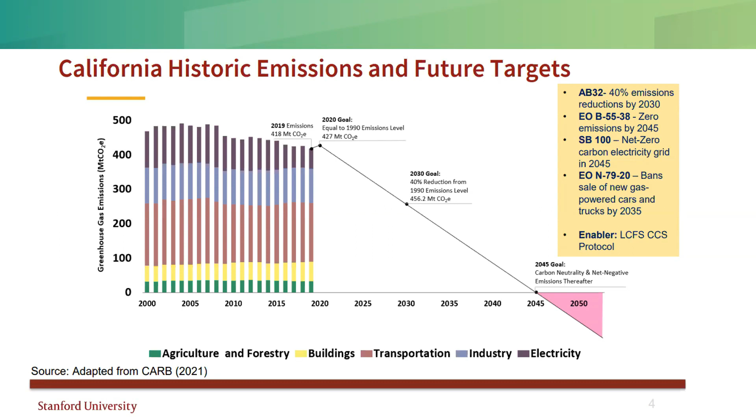I certainly enjoyed this opportunity when I was at the ACI conference in San Francisco. But just to give you a little insight as to what California is looking toward in the future: in 2006, California passed AB 32, which required the state to be, by 2020, at 1990 levels of CO2 emissions. In 2030, we're required to be 40% below 1990 levels, and then to reach essentially carbon neutrality and net negativity after 2045.

The cement industry has been a key part of the cap and trade program here in California, and you can see on this slide we work very closely with the California Air Resources Board in terms of closely monitoring our emissions, but also projecting and enforcing reductions in our emissions. In the state of California, you can see on this graphic that while the industrial sector makes up about 20% of emissions in the state, the cement industry is right around 2%.

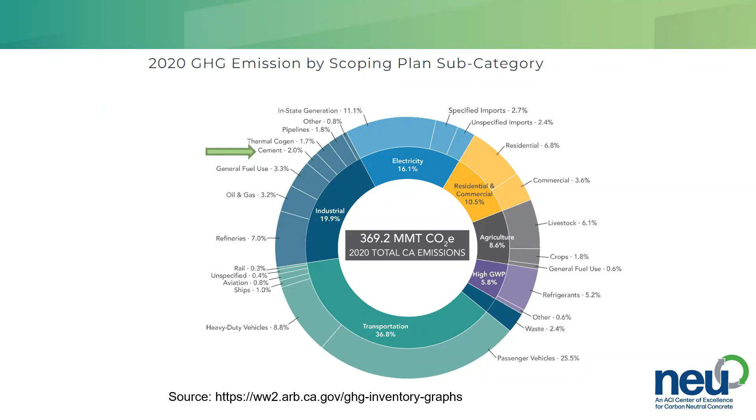That's larger than the percentage nationally, which is closer to 1%, but that 2% comes from the 7 cement plants in California, and we are on that same trajectory to hit carbon neutrality by 2045. Our industry is committed to this. We wanted to mention that we have a carbon neutrality plan that we came out with 2 years ago, which we're about to reissue with updates this coming month in July, right around the flip of the calendar. We're pretty excited about how we're seeing progress in certain areas, and we've identified new opportunities. I'll describe what that carbon neutrality plan includes.

It includes this one bold goal of reaching carbon neutrality by the end of 2045. What we recognize is that this is a commitment that's one of these all-of-the-above approaches. You'll see the 8 levers in this plan, but we believe all of them are important to really unlock that pathway to make this happen.

It is extraordinarily difficult to do this, and we also recognize that we need close coordination among stakeholders throughout the value chain. This doesn't just include industry, but it includes owners, developers, engineers, and architects - I'm pretty sure we've got a few of those in the virtual room here today. And we've got a very high priority of dealing specifically with stakeholders through the public policy ecosystem - that's legislators, regulators, and other stakeholders.

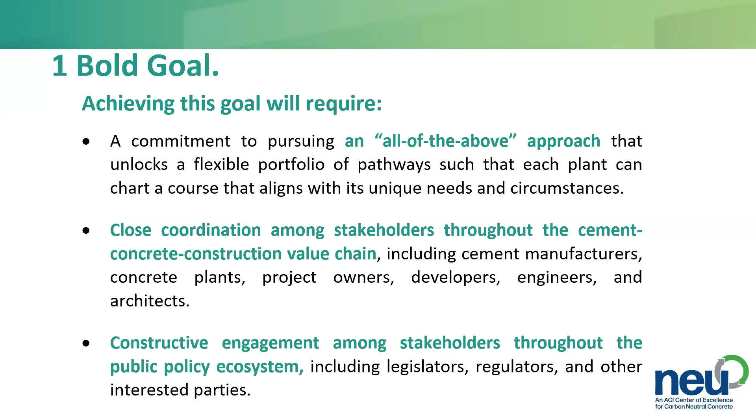Now I'm going to show you a couple of slides which may seem very basic, but it gets to how we're approaching carbon neutrality. I'm guessing most of the folks in the audience this morning understand how cement is produced and that we have a necessary thermal process, which really comes from two sources.

The emissions that come from cement production include both process emissions and fuel emissions. It's really that 61%, the big blue part of the circle on the right here, that is the most difficult to abate.

As you probably already know, the limestone that comes into the kiln that you see here on the left-hand side finds its way down and goes through a calcining process, which naturally releases CO2 when you're basically melting it and changing its chemical composition.

So our plan looks at both process emissions and fuel emissions with specific strategies and goals. And this is what it looks like. We have three pathways and eight levers.

The process emissions are really addressed through these first three levers. The first of which is blended cements. This is the lever that if you're an engineer, you can reach for and start pulling on now.

All of the other levers, two through eight, really have to do with the way cement is produced within the footprint of a specific plant. But as you can see here, we've identified levers such as carbon capture, use and storage, alternative cements and clinkers, all as part of process emissions.

For combustion emissions, we've identified renewable natural gas, various types of alternative fuels, and on-site electricity generation as another area that we think is vital for reaching these goals.

As you can see in these first two columns, we recognize the need for legislative assistance in six of these eight levers, and for regulatory assistance in seven of these eight levers. And knowing that cement is the largest impact for CO2 in concrete, we recognize that this matters not just for our industry, but for the entire concrete industry.

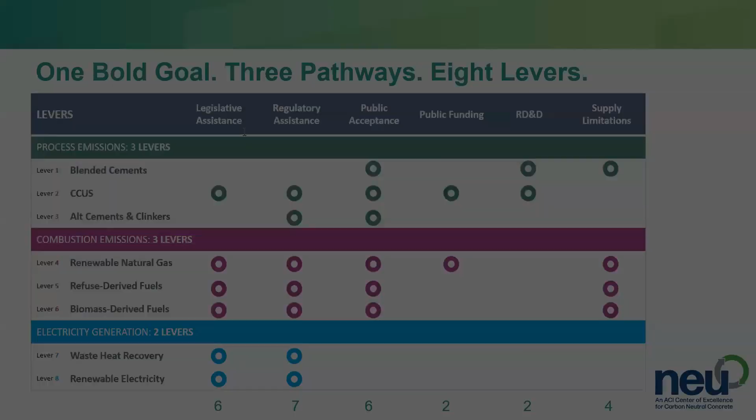This is why we spend so much time focusing on the legislative and regulatory part of each of these endeavors. We also have public acceptance, public funding, research, development and demonstration, and supply limitations that all come into play for various parts. We also recognize that these various levers have different timeframes.

The timing is important because reaching this goal of 40% reductions by 2035 per the Senate bill I'll be mentioning, and net zero by 2045, really puts pressure on us to start making a difference.

I'll mention one of those, carbon capture, use and storage. Just talking to one of our member companies recently, they anticipate an 8-year process to install a full carbon capture system at a plant. That timeframe really needs to be sped up and accelerated for us to start meeting some of these goals. But we'll talk about a couple examples here.

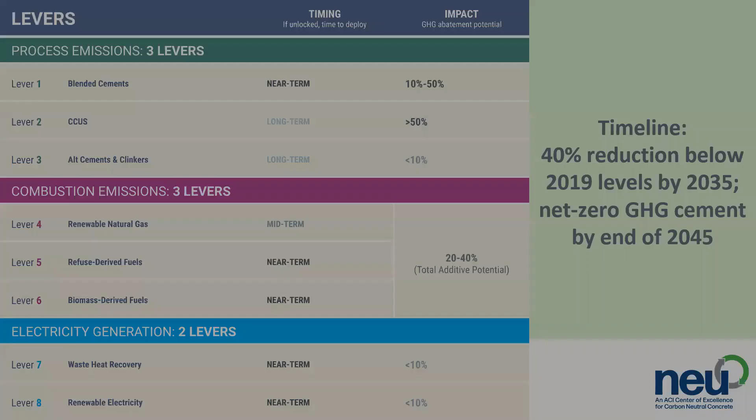I won't get into all eight of these, but I'll show you what a few of these look like in terms of how we're doing this.

So pathway number one is reducing process emissions, as I mentioned. It is the most significant constraint on abating emissions for our industry because of this natural byproduct in the process.

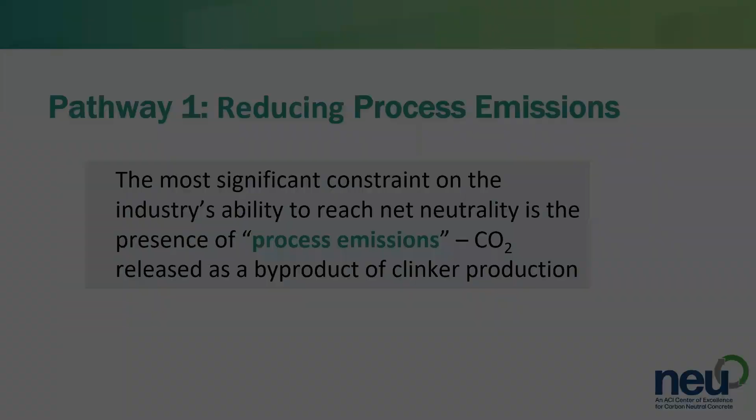So one example of a product that is becoming more and more familiar, not only in California but beyond, is Portland limestone cement. I feel here that the California story is important because so many states in the West look to Caltrans for approval.

And this doesn't just go for DOTs. Caltrans approval is looked to throughout the industry here as something very important. But nationally, we know that all the major barriers are removed, from AIA to government work throughout the Defense Department, ACI, ICC building codes include PLC.

Caltrans was the 38th state to approve Portland limestone cement, but only after a 3-year study at Oregon State University, where they really wanted to dive into the impacts of California-specific materials.

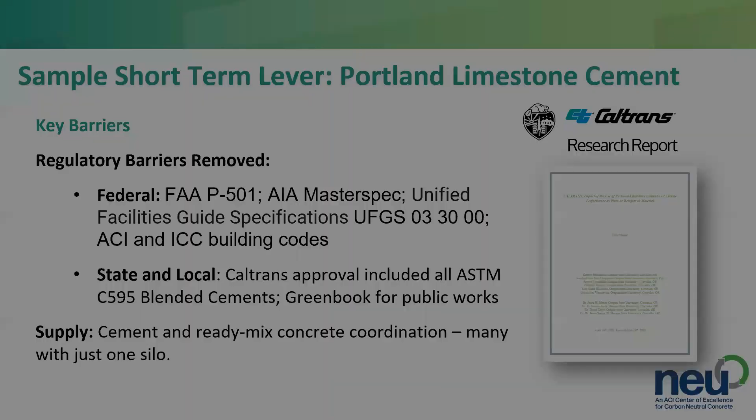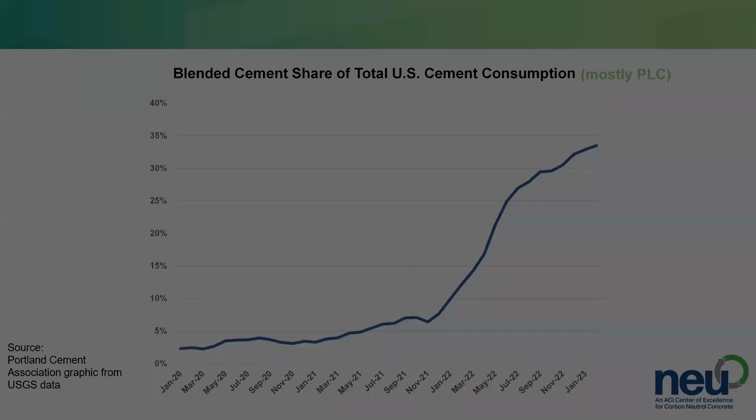Another lever related to process emissions is carbon capture. Here, we recognize that technologies are still in the early stages. There's only a handful of projects underway globally at the moment, and it also requires quite a bit of energy and cost.

So this is one of the areas that we feel like it's very important to work with state government, particularly in a market like ours, which is exposed to imports as well. So if cement plants are making investments as deep as these are for carbon capture projects in California, our companies need to be assured that it's not a risky investment.

We also recognize beyond the cost impacts that there are significant permitting delays that typically impact projects of this size. So those are some of the things that we're looking for, really pushing forward with that particular technology.

Pathway number 2 looks at fuel switching. One of the things we are looking at is using different types of fuel in cement kilns, much like we see in other parts of the world. The emissions intensity of products other than coal can help reduce emissions here, and it's really the amount of these alternative fuels that we'd like to see increased. For instance, the EU is now over 60% in use of alternative fuels, while the United States is at 16%, and California is still under 10%. So we've got a ways to go in this area.

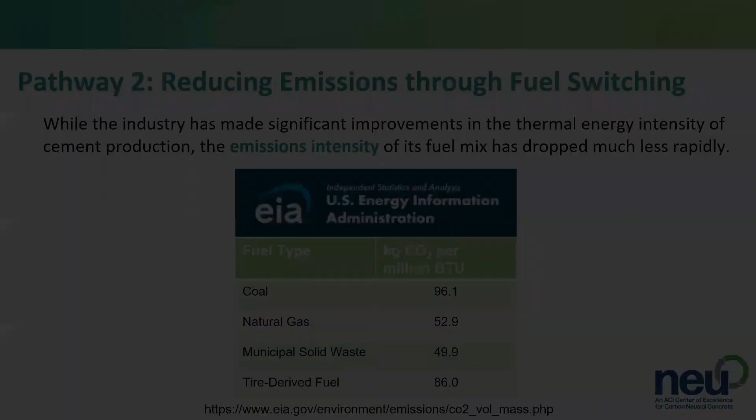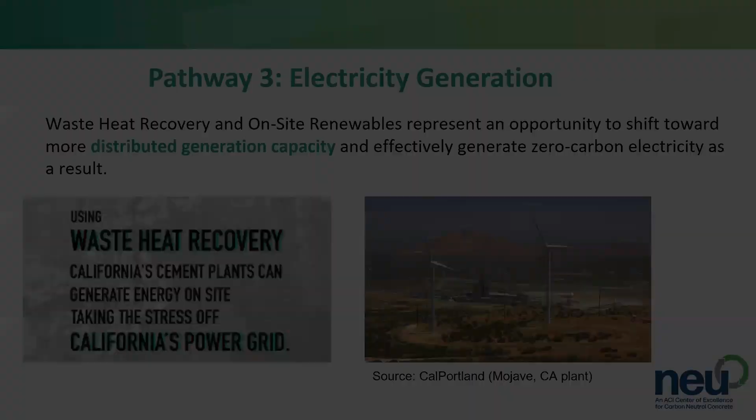Now I'll mention Senate Bill 596. I outlined the pathways we see for getting to carbon neutrality. Shortly after that report, completed in 2021, came out, we worked closely with Senator Josh Becker out of the Bay Area on this bill, along with the Natural Resources Defense Council. This is important because it goes back to the need for legislative and regulatory assistance to hit these aggressive goals. This was a landmark bill, not just for our industry but for the state of California—the first bill in any California sector to focus on achieving net zero emissions.

I'll show you two slides with some of the text within that bill. Senate Bill 596 recognizes that there are a wide range of commercially available technologies and practices that exist to reduce and remove emissions of greenhouse gases throughout the life cycle of cement and concrete production and use. But these technologies and practices face a series of market and regulatory barriers hindering their deployment. So they're recognizing these barriers.

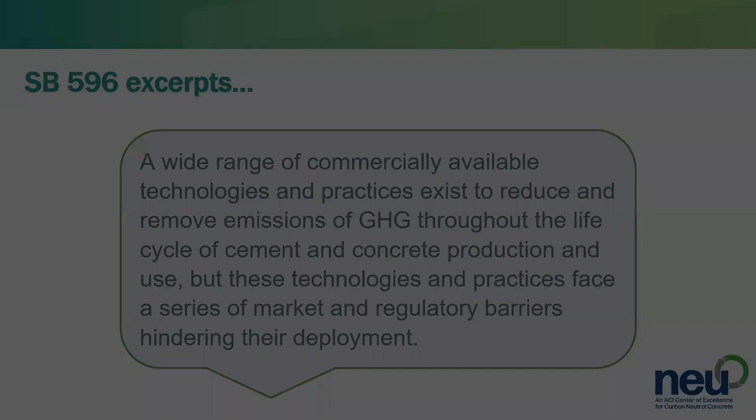Here's how we feel Senate Bill 596 can help accelerate the progress we need. It states that the state board shall document the feasibility constraints and recommend measures and actions, including proposed statutory changes necessary to overcome those constraints, to enable the cement sector to achieve net zero emissions of greenhouse gases as soon as possible, but no later than 2045. That's where we need to start moving faster. So that's an overview of Senate Bill 596 and how the California cement industry is striving and pushing aggressively towards carbon neutrality by 2045.

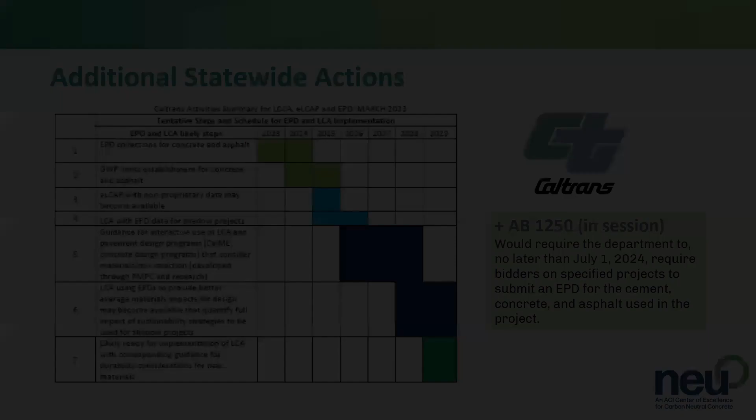I also wanted to mention that Caltrans is involved in this too. So it's not just the buildings market, but also infrastructure. On the left-hand side of the screen here, you can see a roadmap that Caltrans has put together related to collection of environmental product declarations for both concrete and asphalt, establishing global warming limits, and producing a life cycle assessment tool. In addition, on the right-hand side of the screen, there's a current bill in the assembly here in California that would apply additional pressure for Caltrans to make these things real.

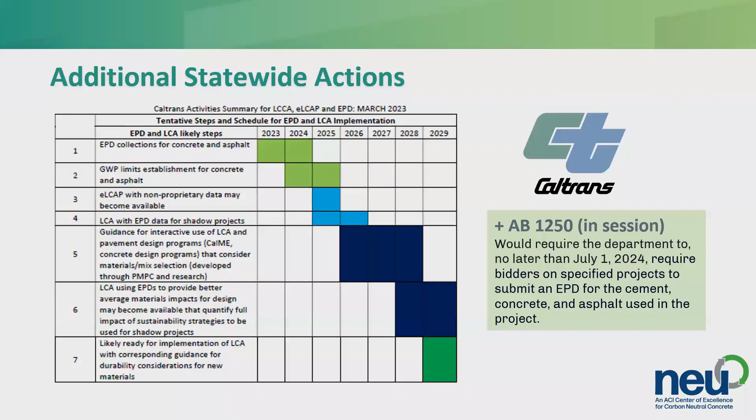Here's the Marin County Low Carbon Concrete Code. This is significant not just for Marin County, which is just north of the bay from San Francisco, but has been really used as a model for efforts around the country, not just here in California. In this case, you see two ways of measuring the global warming potential for concrete in this program - you can either have a limit on the amount of cement in your mix in that middle column, or if you have an environmental product declaration, you can be required to meet these limits of global warming potential. The 360 was the number for the regional average; this particular program is looking at 313 for a 4,000 PSI mix. You can see those numbers for other strengths as well.

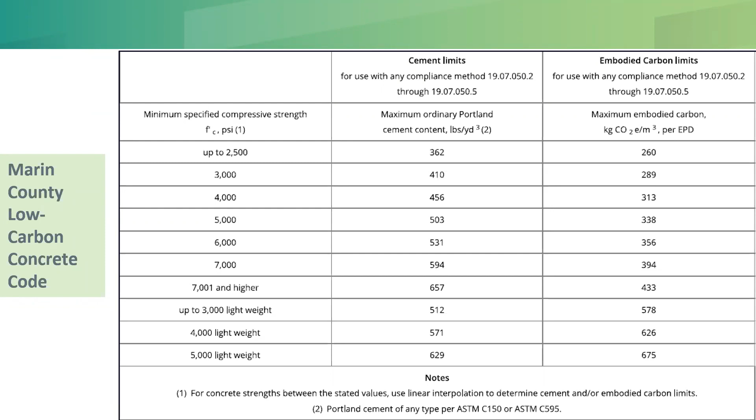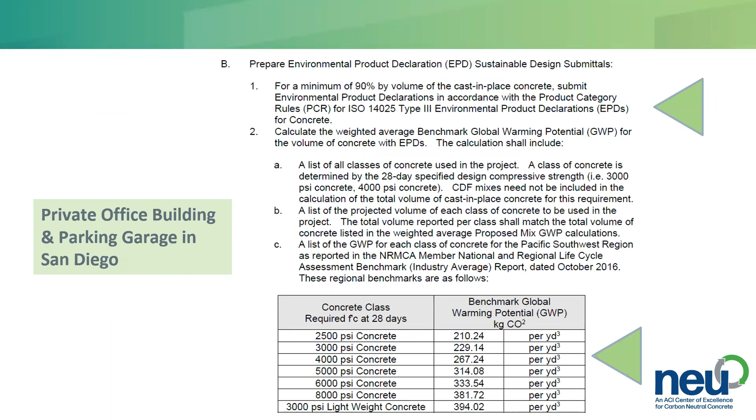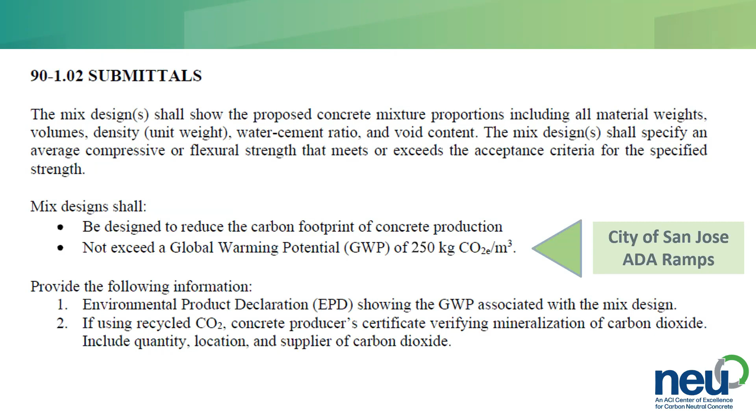Here's just a couple other examples of projects. This is a private office building and parking garage in San Diego. In this case, for the 4,000 PSI mix, they're looking to get all the way down to 267 in terms of global warming potential. Another example here, down to 250 kilograms CO2 equivalents for the city of San Jose, ADA ramps. The Capitol Annex in Sacramento - they actually take different applications of the concrete project in terms of where the concrete will be used and their strengths, and include a variety of global warming potential maximums for those mix designs.

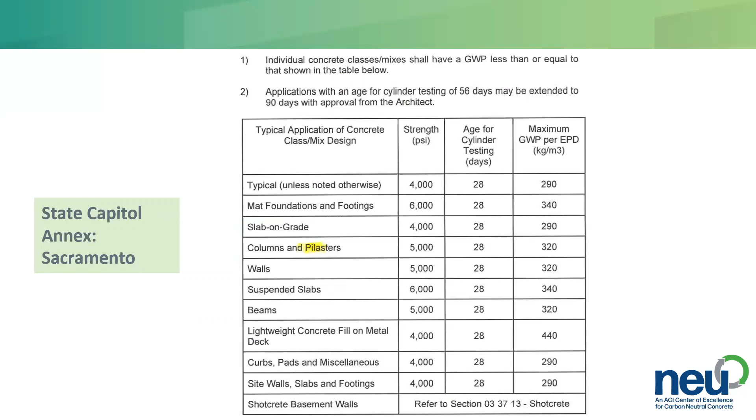So these are examples of things that we're seeing locally. In summary, I want to make sure I've communicated a few things this morning. Number one, decarbonizing cement production is very essential in meeting aggressive global warming potential reduction goals, not just for cement, but also for concrete. We hear numbers, whether it's 85 or 90% of concrete's CO2 impact coming from cement. We really believe that supporting our initiatives here in California and PCA's roadmap to carbon neutrality - all of those levers are essential and important, not just one, all of them are important, as I mentioned earlier, for achieving these goals.

I also want to mention that specifically here in California, we are very committed to working with others. That includes policymakers right in the Capitol, where I spent time this week, regulators, developers, engineers, architects, advocates, and others to advance solutions to remove these barriers that are so essential for us to achieve the aggressive provisions of Senate Bill 596. Lastly, I would really encourage everyone listening today to get involved. I've heard folks, particularly from the cement and concrete industry, occasionally complain about the way certain things go. My admonition there is to be involved. Get involved and understand what's happening so that your voice is heard and you can be part of the solution. That's my strong recommendation. I appreciate this opportunity, and now I will pass it back over to NEU.